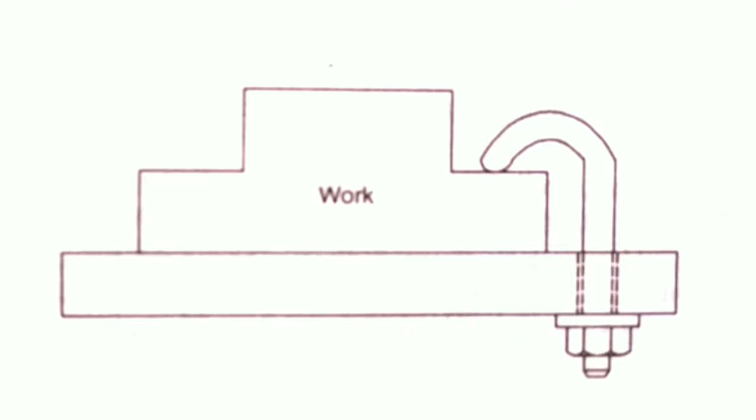The second type is hook bolt clamp. You can understand from the name itself, there are hooks provided. This is a very simple clamping device and is only suitable for light work and where the usual type of clamp is inconvenient. This is the clamp in real use in the industry.

Just by rotating the clamping bolt, we can easily remove the workpiece from that bench. Another example, here we are using an Allen key and removing that component from the fixture.

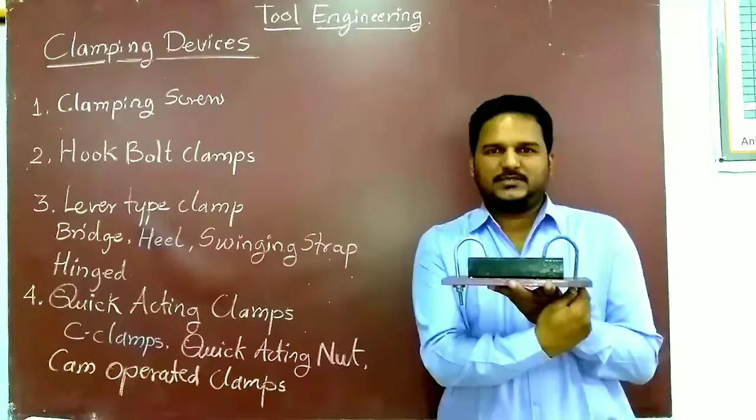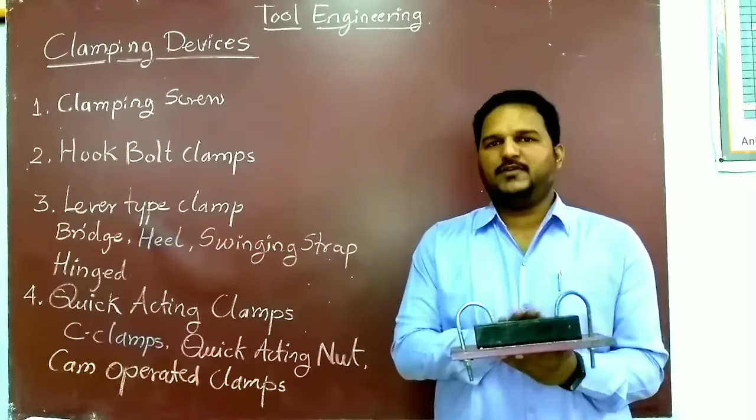This is the hook type clamp, where workpiece is clamped based on the hooks. These hooks are there, so we can clamp this workpiece firmly on this plate. This is again the simplest form, where only smaller workpieces are clamped on these clamping devices, where we have the product smaller in size.

Next type is again categorized into the lever type clamp. Under the lever type clamp, we have bridge type clamp. This is the bridge type clamp. It is very simple and reliable clamping device.

The clamping force is applied by a spring loaded nut as shown in this figure. The relative position of the nut, the point of contact of the clamp with the work and with the outer support should be carefully considered, since the compressive force of the nut is shared between workpiece and clamp support inversely as the ratio of their distances from the nut.

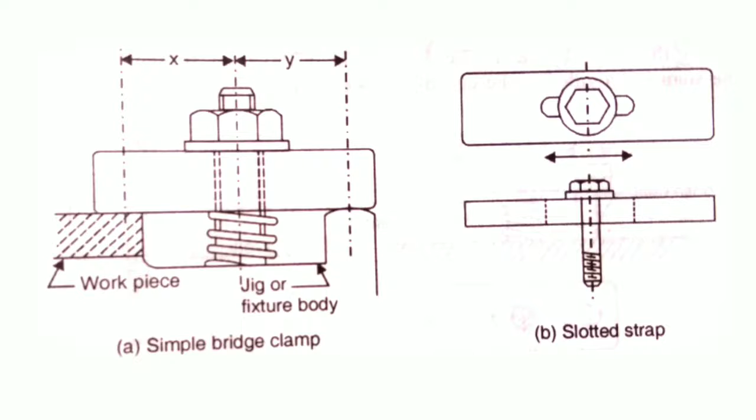Next is heel type clamp. For the heel type clamp, these are the two types. This consists of a robust plate or strap, center stud, and heel.

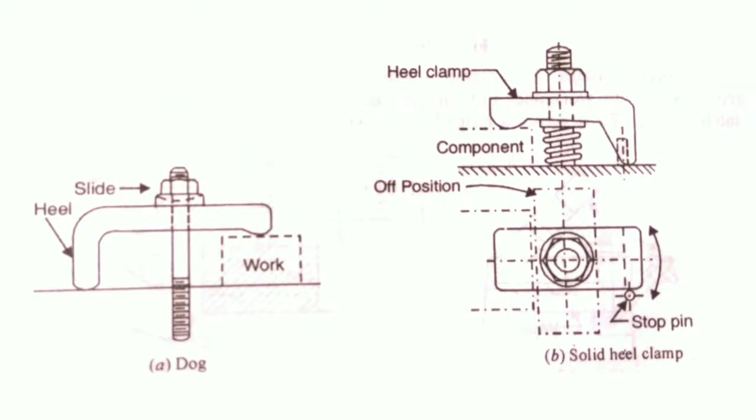The strap should be strengthened at a point where the hole for the stud is cut out, by increasing the thickness around the hole, as shown in design A, which differs from the simple bridge clamp shown in the previous two-way clamp.

This is another version of the heel clamp where workpiece is loaded into the jig or fixture or removed from these by rotating the clamp.

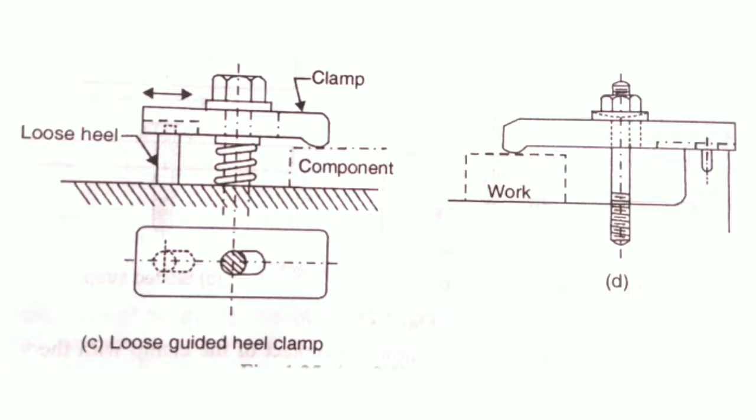In this design, the clamp is guided by a loose heel which is driven into the jig or fixture body. A short stem is turned on the end of the heel which fits loosely into a keyway in the clamp strap. The loading and unloading of the workpiece is obtained by reciprocating the clamp by hand.

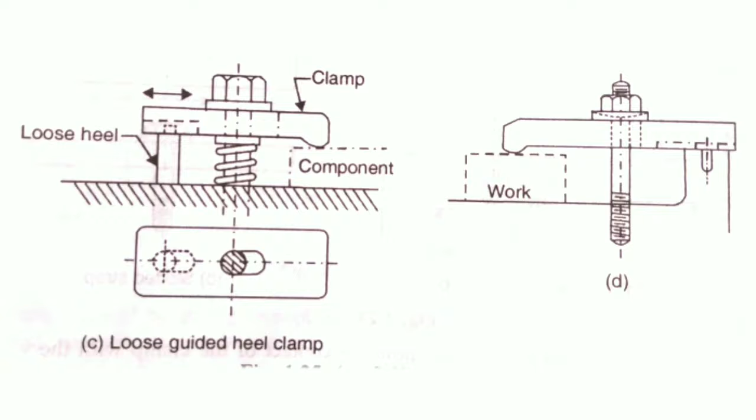This design is shown in figure D. It is similar to figure C, but here the stem is provided at the end of the heel which forms part of the jig or fixture body casting.

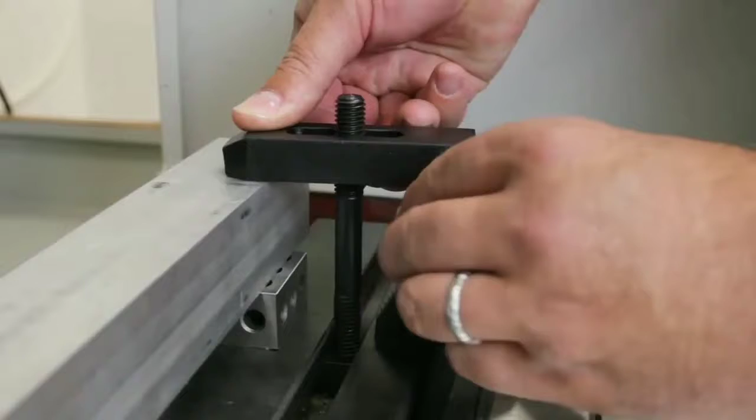Next clamp is swinging strap clamp, also known as latch clamp. This is the real application of the strap clamp in the industry, where serration and blocks are used to tighten the strap clamp on the workpiece.

In this video, you can see the nut is being tightened by the spanner to lock the strap clamp and lock the workpiece on the machine table itself. So with the use of spanner, we can lock the strap clamp.

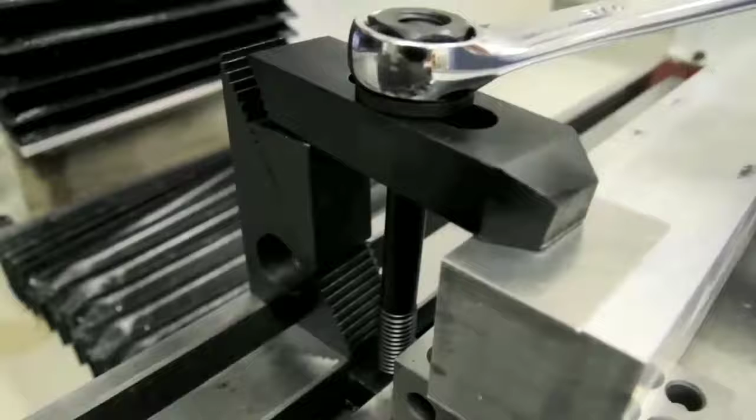This is a special type of clamp which provides a means of entry for loading and unloading of the workpiece. For this, the strap, latch or leaf can be swung out or in. These two designs show the swinging latch clamps.

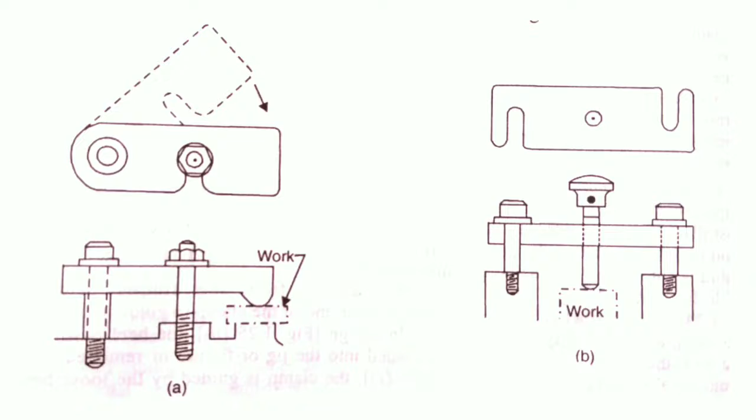Next type is hinge clamp. This clamp is similar to the swinging latch clamp, in which the latch is hinged to enable the workpiece to be loaded and unloaded. The clamp can be made integral with the latch, as shown in this figure A.

A hinge clamp which is locked by means of a bolt is shown in figure B. It shows a hinge clamp provided with a hook cam. This clamp is much quicker than the bolt type and is suitable for workpieces which maintain dimensional accuracy. The hook end of the operator lever acts as a cam and engages a pin.

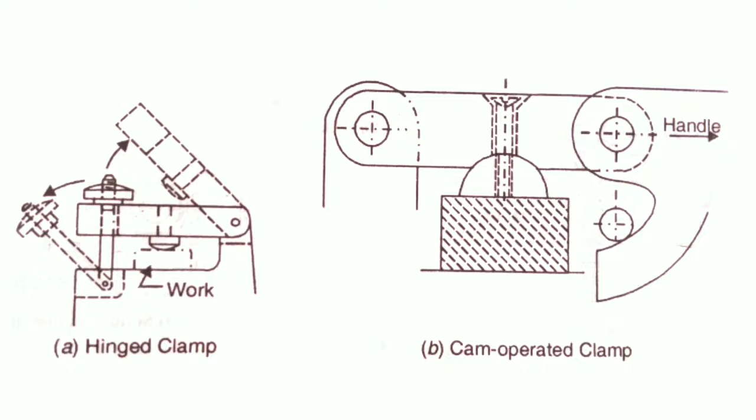This figure shows some other designs of the leaf or straps which may be used for swinging latch or hinge clamps. Next type is quick acting clamps.

Now under the quick acting clamp we have the C clamp. This figure shows two types of C clamp. Figure A represents free and figure B represents captive C clamp. To unload the workpiece, the locking nut is unscrewed by giving it about one turn, and this releases the C clamp. When the clamp is removed, the workpiece can freely pass over the nut. The reverse procedure is adopted for loading the workpiece.

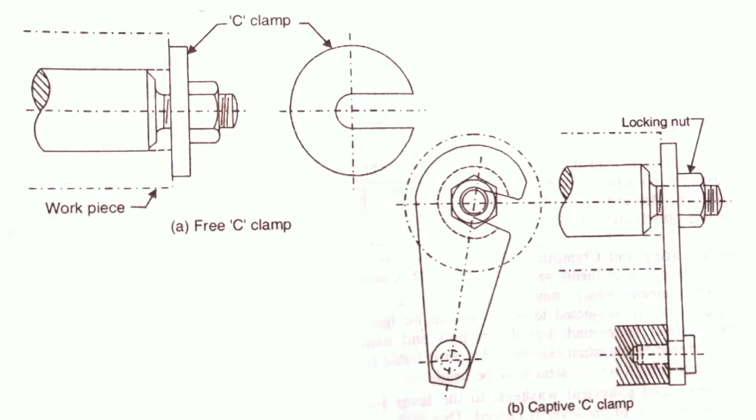The captive C clamp may be fastened to the jig or fixture body to prevent it from being lost.

Then next is the quick acting nut. The threads of the nut are not continuous but are interrupted. The length of the nut is about 2 to 3 times the thread diameter. The diameter of the clearance D is slightly bigger than the outside diameter of the thread, and the axis of the hole is inclined at an angle of 3 to 7 degrees to the axis of the nut.

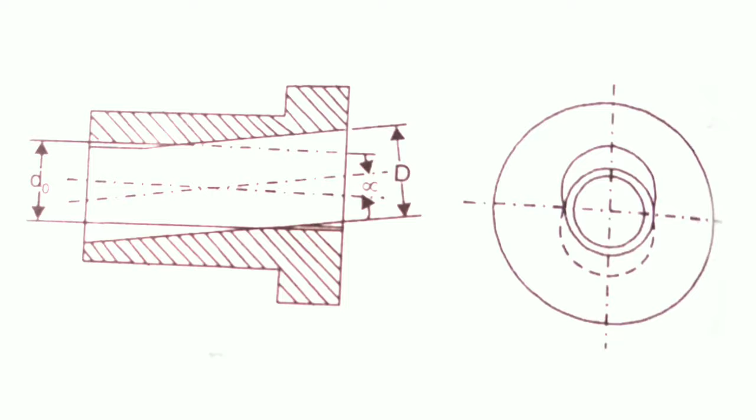The use of the quick acting nut is explained in this figure. When the nut is assembled over the male thread, it is inclined to the axis of the clearance hole. When the nut engages the male thread, it is dropped onto the screw thread and is then tightened and locked by giving it about half a turn.

Next type of clamp is cam operated clamp. These clamps find broad application and are fast and positive in action. These should not be used where vibrations are present or where the dimension of the workpiece varies.

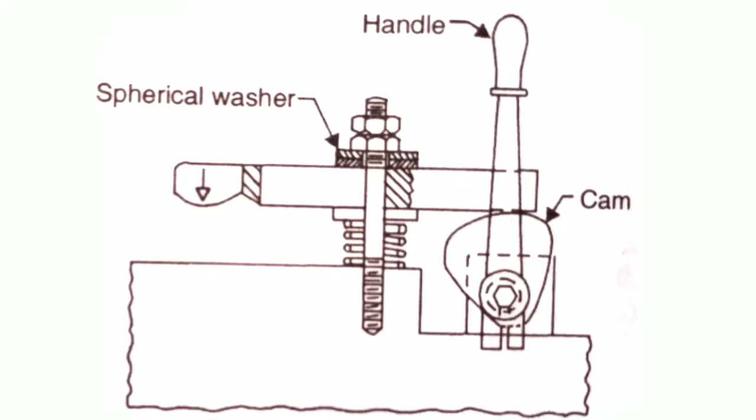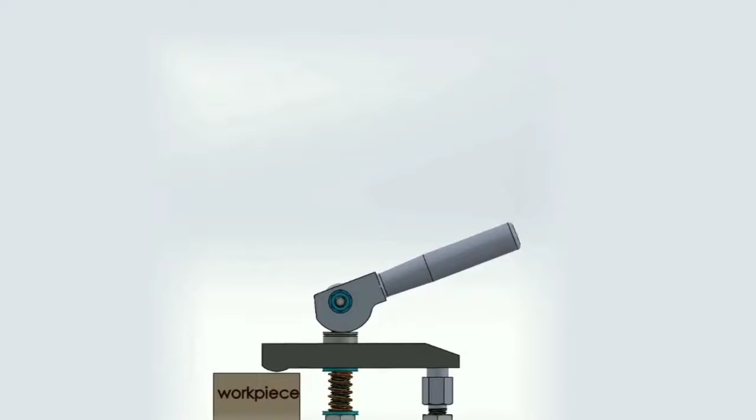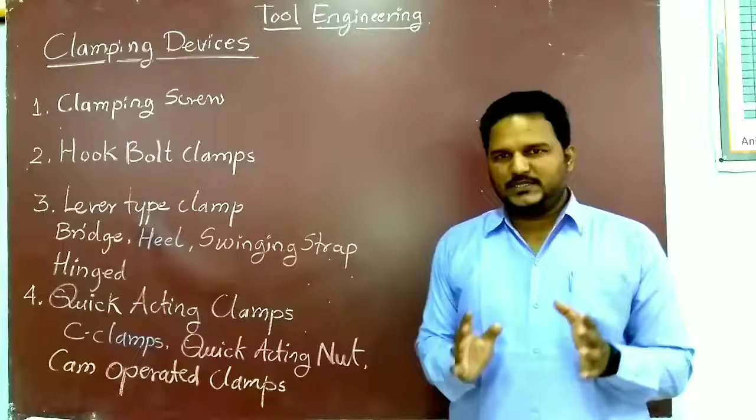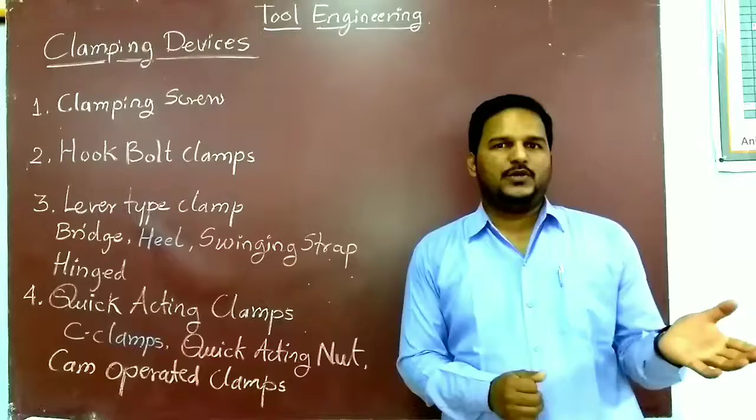So in today's lecture we have learned various clamping devices, their use from the basic figure towards the application level also. We also discussed the in-depth construction of each clamp and how that clamp works. In the next lecture, we will see the design principle behind this clamp. Understanding of the clamp is very important to have the correct design of jigs and fixtures. Unless and until you know the locating and clamping devices, you cannot design the jigs and fixture. So understanding of the clamping devices as well as the locating devices is important, so that we can design the jigs and fixture.